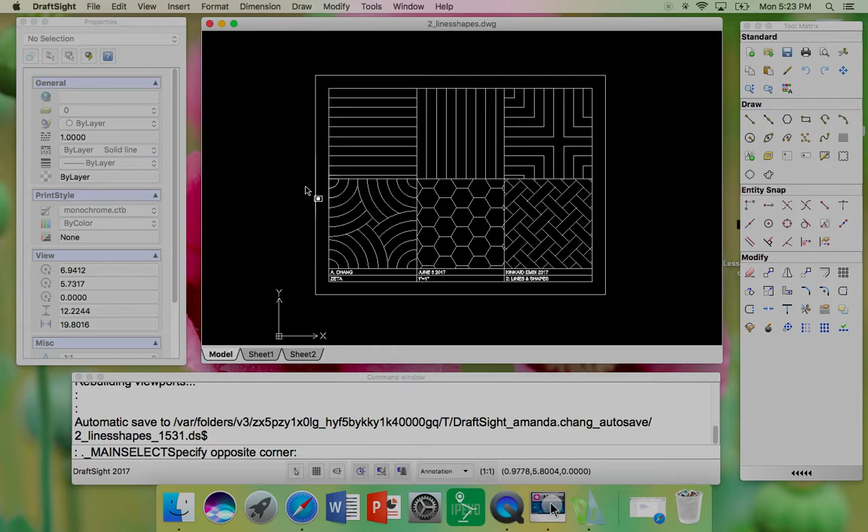Hello everybody. This is a follow-up to lesson 2, and I have it up on screen. We're going to print your work. When you completed lesson 3, we went in depth about how to set up the printer and the printer style.

We also learned about scaling the viewport. In this tutorial, it's not really about line weights and the monochrome CTB thing. It's really about how do we print this at 1-to-1 scale. We want it to print the size of the whole paper, not just a little portion of it.

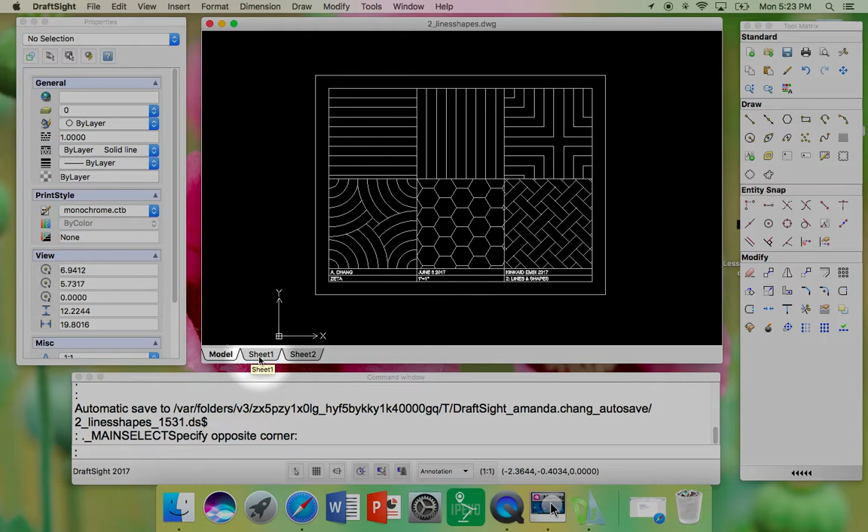Let's get started. Right now we are in model space, so let's go to the sheet layout space. I call it paper space. Go to sheet 1, and this is what you see. You have your paper, you have a dotted line which is some kind of margin - I don't really know what that is - and then you have your viewport.

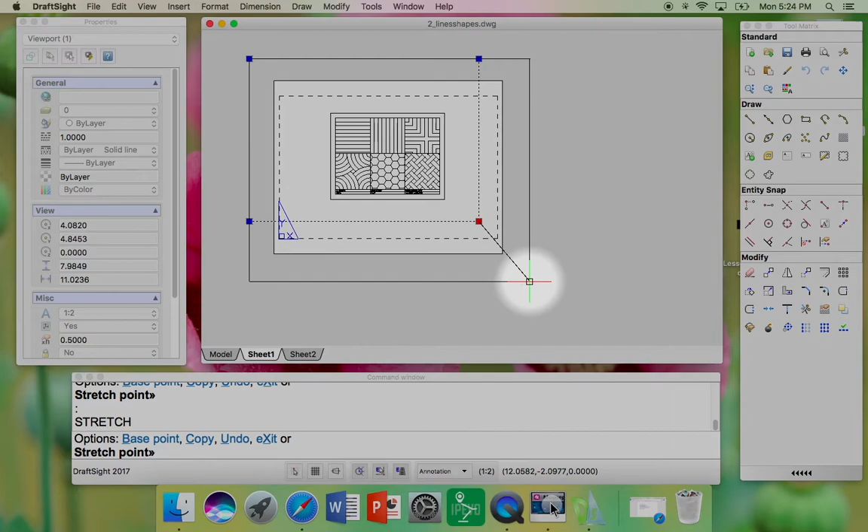Let's go ahead and make our viewport really big, because I'm getting confused with all the lines on the paper. So the viewport is really big, like this. Now I want to make this viewport 1-to-1. I want to make sure that everything in this viewport is actual scale.

I'm going to select the viewport and go to my properties window. First of all, I want to put this layer on - actually, never mind, we don't have to do that. If you make your viewport really big like this, you don't have to worry about your viewport printing. It's not going to print because it's not on the page. So let's just leave it like that.

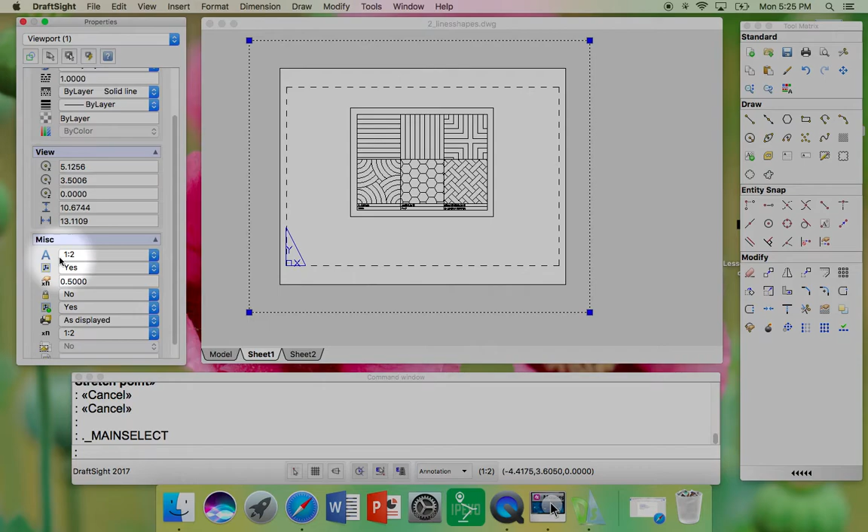Let's go to the annotation scale and click 1-to-1. If it was already on 1-to-1, you have to click out of it and then click back into it in order to be 100% sure that it's good.

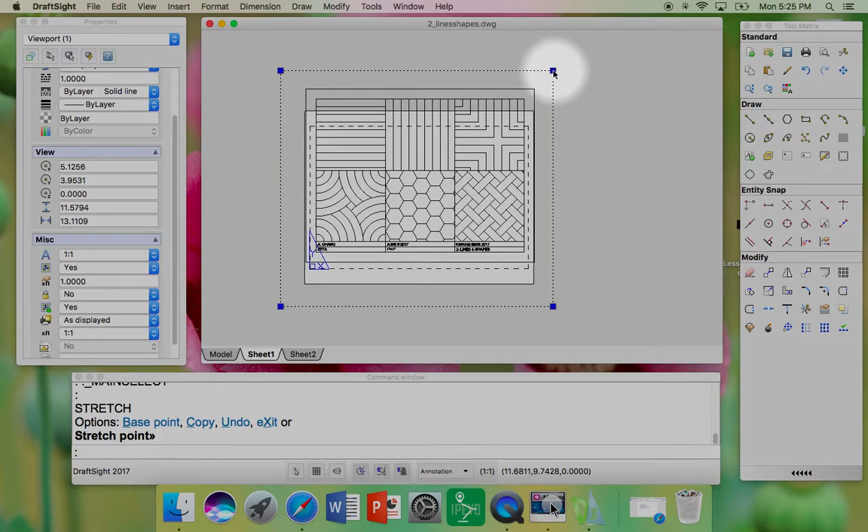Now I'm going to just adjust my viewport so I can see my whole page, my whole drawing. So it looks like that.

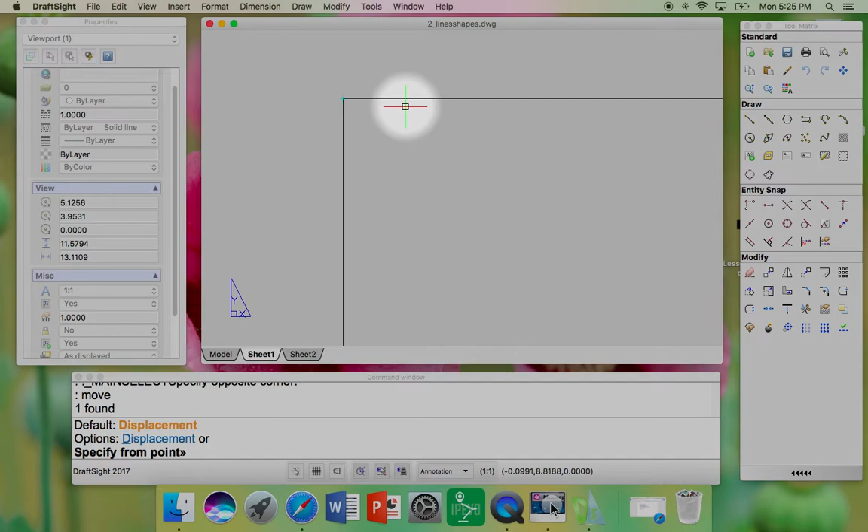Now we need to align our drawing to the page. I'm going to select my viewport, type the command move, and when I move it, I'm going to get as close as I can and snap to the corner of my drawing. I'm going to align that with the corner of the page - I can't snap to the corner of the page, but I can get pretty darn close.

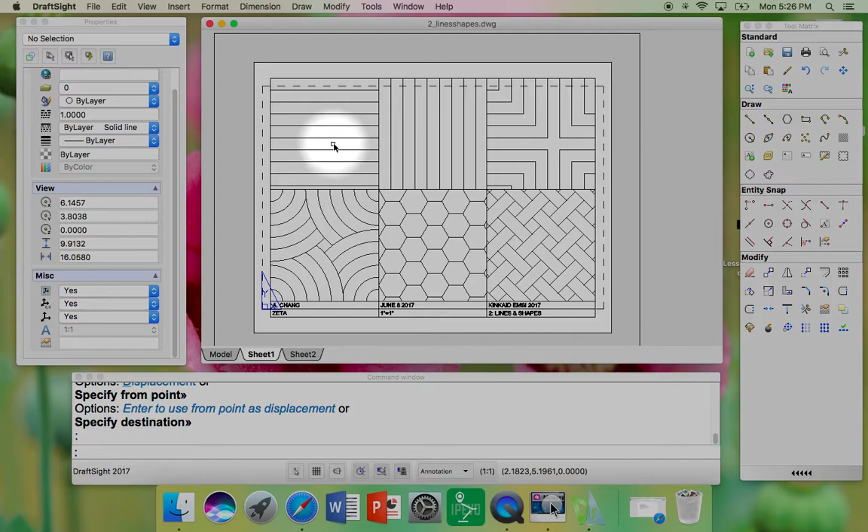So I scrolled in a lot, I really zoomed in. This is what it looks like. Normally you can print like this - if you were working at an architecture firm, you could print like this. But for some reason the Kinkaid printers are really weird, so we have to do something funky.

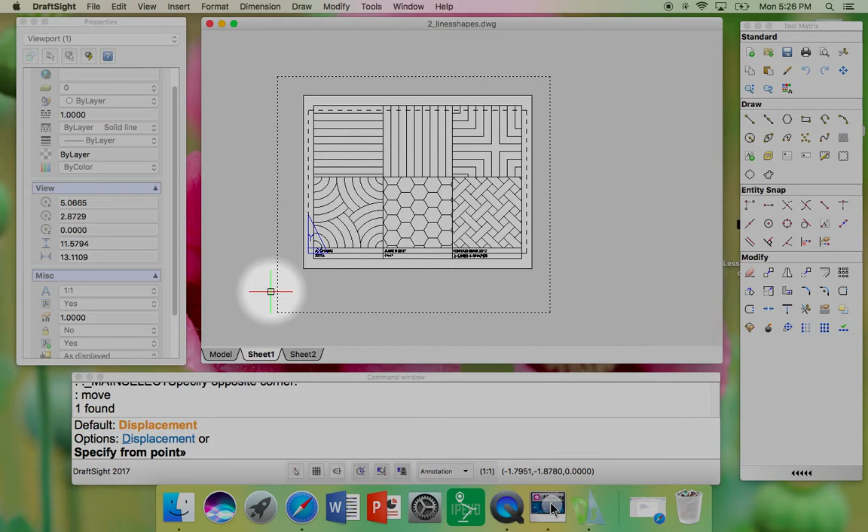The funky thing is that we have to move our drawing 0.75 inches up, 3/4 of an inch. So we're going to select our viewport, type the command move, say D for displacement, and move it up 0.75. It's going to look like it's falling off your paper, and I don't really know why this works, but it does.

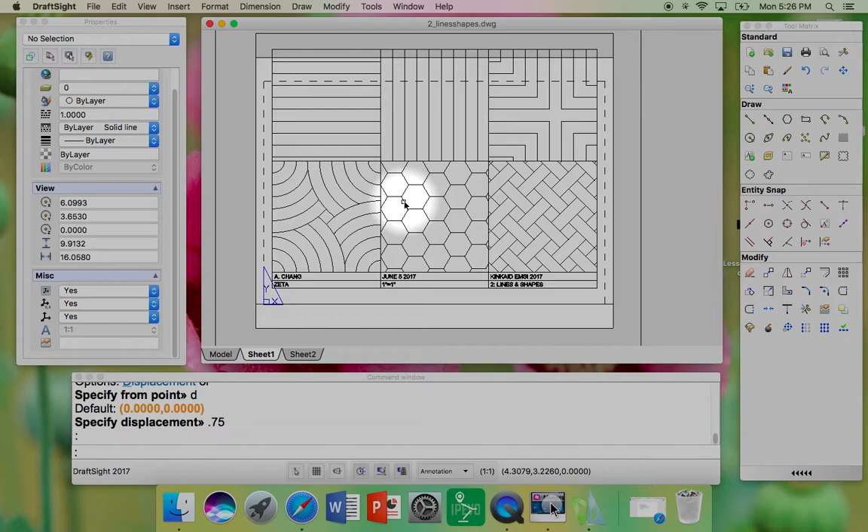Now we can do command print or control print. That's going to bring up our printer dialog box here. Make sure you select the Kilroy BW HP M600.

In this case it doesn't matter - if you already have monochrome CTB, you can use that. It doesn't really matter because we don't have any line weights in this drawing, so I'm just going to use default settings, and that's fine. For copies, let's print 2.

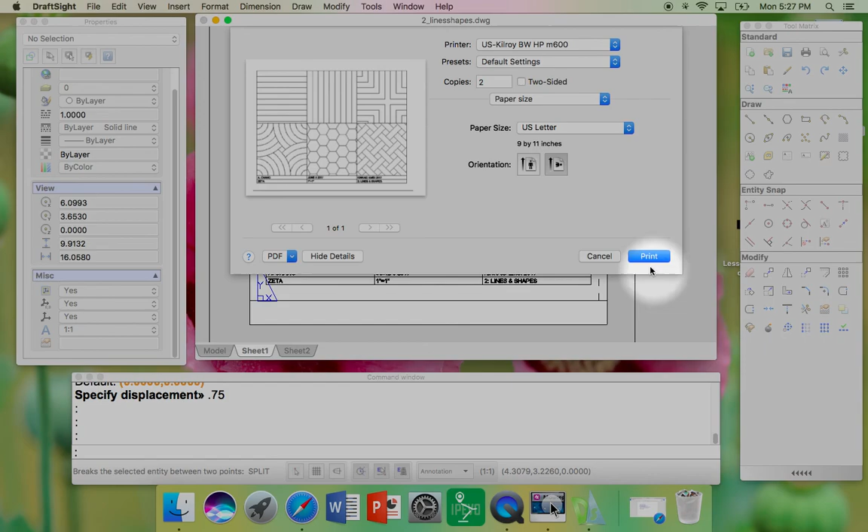So you can keep one and I can keep one. Go ahead and print. Okay, click print. And that completes this little tutorial on how to print your assignment number 2, lines and shapes.